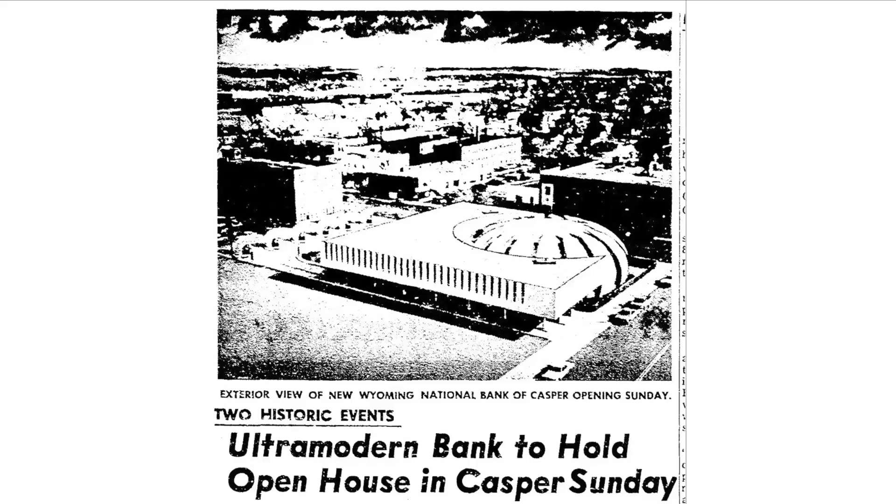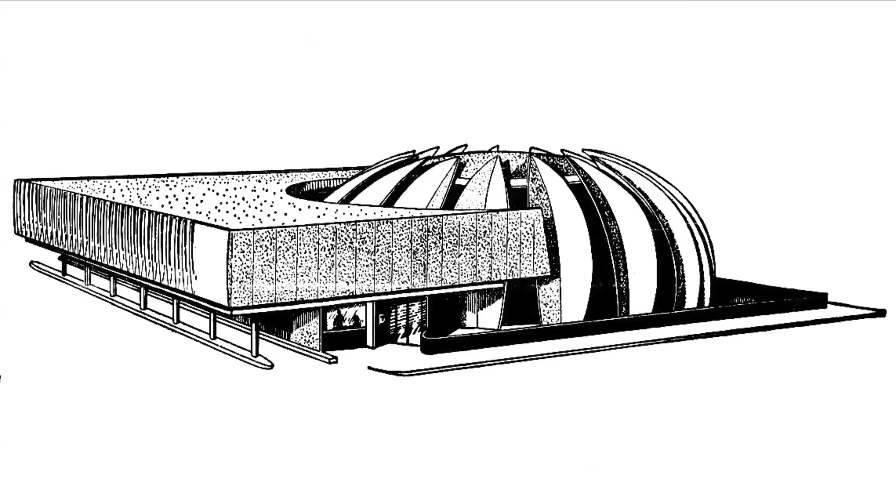And here's just a news piece about it, and a difficult to see photo of the exterior. I like the stippled drawing because it gives you a good idea of really what the building is about. People in Casper called this the orange peel, which I would agree with.

Here's an ad for Idealite concrete, a special lightweight concrete used on the building, and of course the company that makes it had to feature it in an advertisement. It says they utilize lightweight concrete in the large leaf-like blades that form the building's distinctive domed rotunda. The 20-ton blades were created as a work of sculpture and to furnish the required floor space. Each blade is part of the wall as well as the supporting column, making possible a circular room 86 feet in diameter, entirely free of interior supporting columns. Then blah, blah, blah - if you use us, hire us.

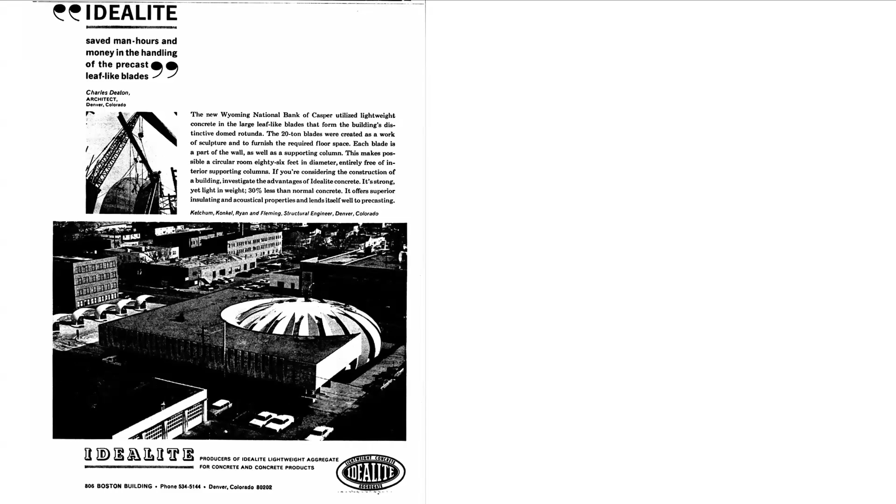And then, of course, there's Deaton's house. This was in 1966. I'm not going to go into great depth on his house because I'll let a friend from Historic Denver talk more about it.

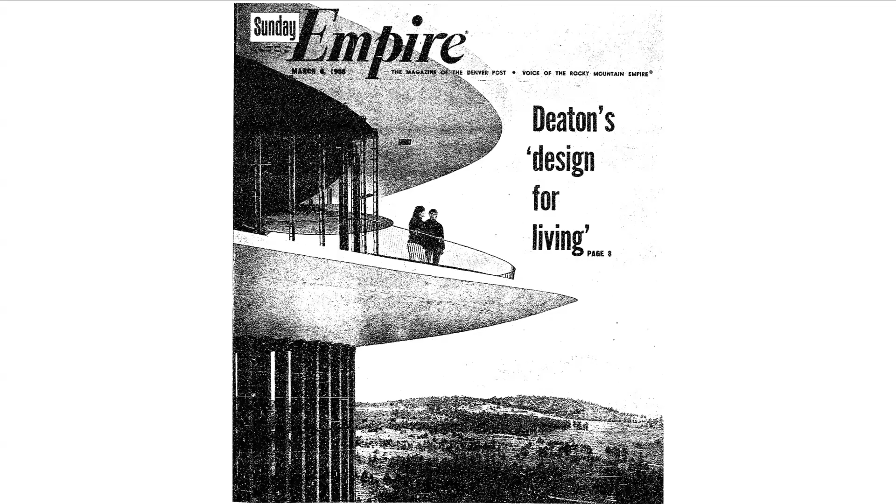Deaton was not working in the shadows doing amazing things - he was clearly a great promoter because all of his projects were very well covered in the news. Thank goodness, it makes it easy to get information about his works. This is the cover of Denver Post's Empire magazine, where his home landed on the cover in 1966 when it was quote unquote complete, although the house was never really complete in his lifetime. It had a huge, three 2-page spreads about it.

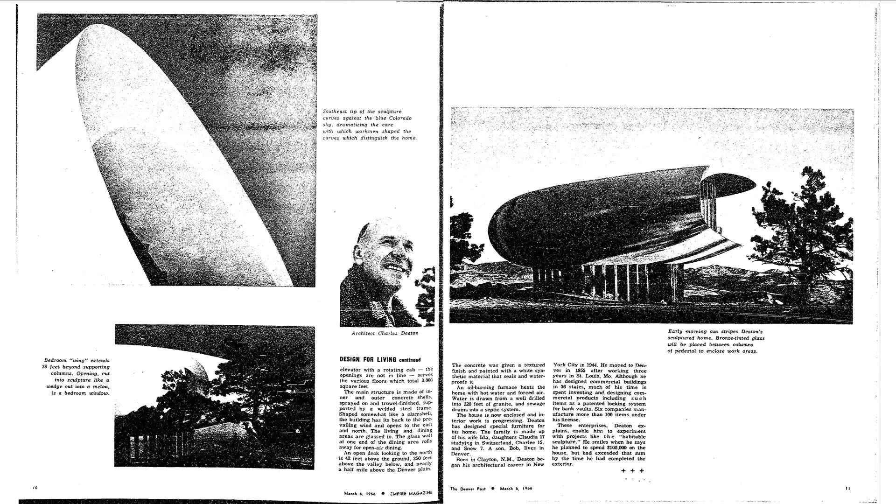So you might wonder, wow, this guy designs one bank and suddenly he's building this wonderful $100,000 house on the side of a mountain - where is he getting all of his money? Because it certainly wasn't from architecture. During his career, particularly working for the bank supply company, he was developing all sorts of inventions, constantly coming up with new ideas.

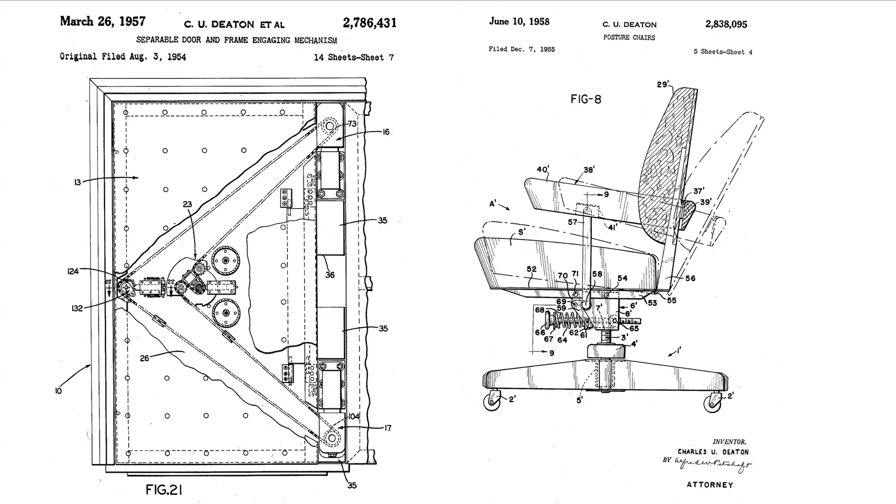He designed furniture, lighting systems, and all sorts of stuff for bank vaults. In fact, around the time his house was built, there were companies already selling over 100 products that he designed under license by him, and that was actually making him very wealthy. That, of course, allowed him to do what a lot of architects wish they could do - not have to worry about profit while designing, because he already had profit coming in other ways.

So here's a couple ads - on the left is a furniture system that he designed, and on the right is a lighting baffle that he designed.

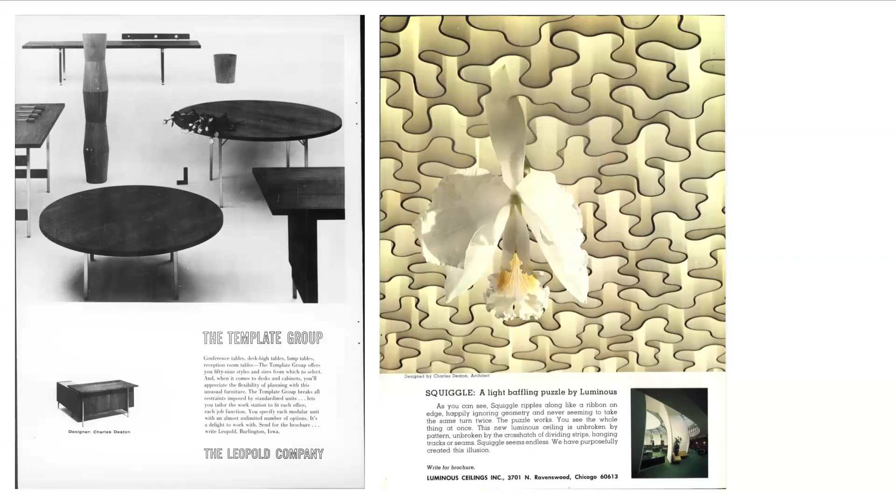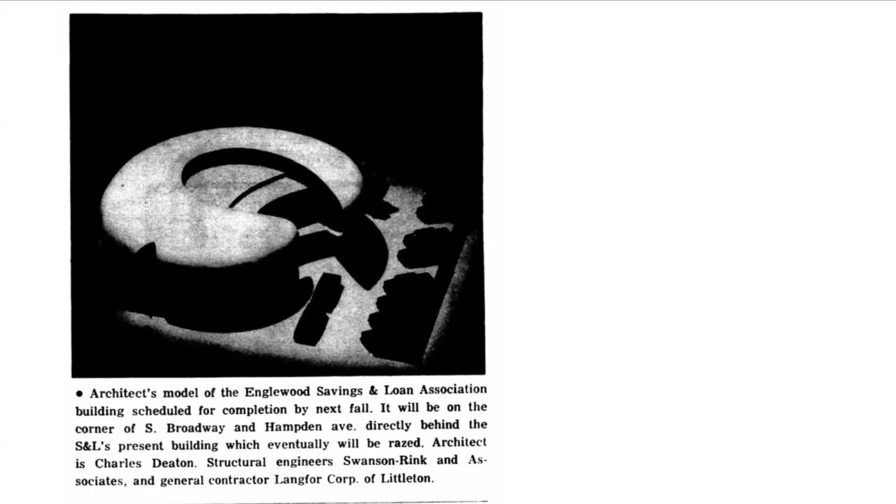This is a model. The model is an important part of his buildings. This was before all the magical technologies we have today, where things can be designed in 3D and spit out drawings. There was no practical way Deaton could create drawings for this building, so the contractor was asked to take the model, measure off of it, and basically replicate it in full size. This was the model the contractor would have used to build the building.

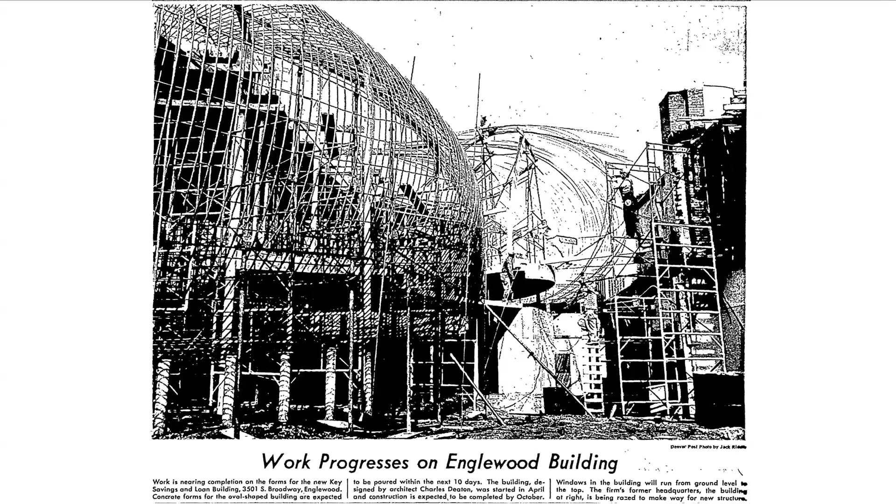There's another shot of the model. This is a difficult photograph to see, but it's the building under construction. Of course, inside all of that concrete is steel rebar, so the concrete sculpture you see today has a steel sculpture beneath it reinforcing the concrete. And of course, Idealite had to jump in with an ad of their own.

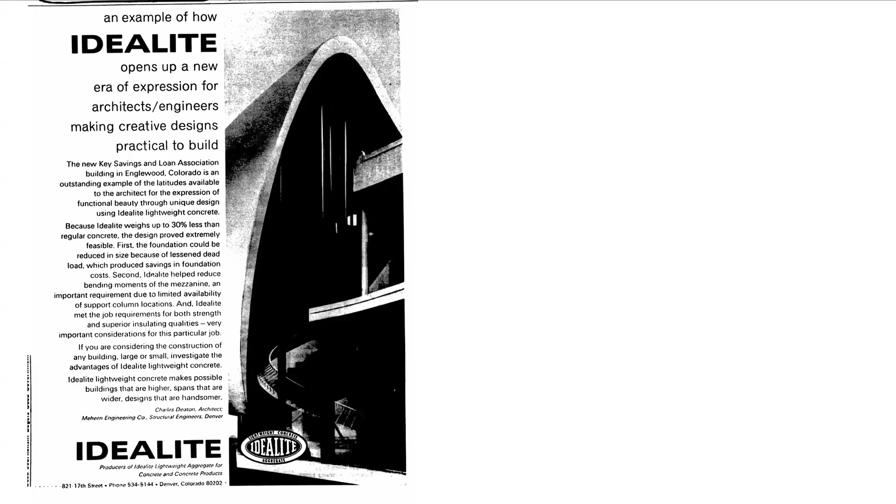The new Key Savings and Loan Association building in Englewood is an outstanding example of the latitudes available to the architect for the expression of functional beauty through unique design using Idealite lightweight concrete. Because Idealite weighs up to 30% less than regular concrete, the design proved extremely feasible. First, the foundation could be reduced in size because of a lessened dead load, producing savings in foundation costs, and Idealite helped reduce bending moments of the mezzanine, an important requirement due to limited availability of support column locations. Idealite also met the job requirements for both strength and superior insulating qualities, very important considerations for this particular job.

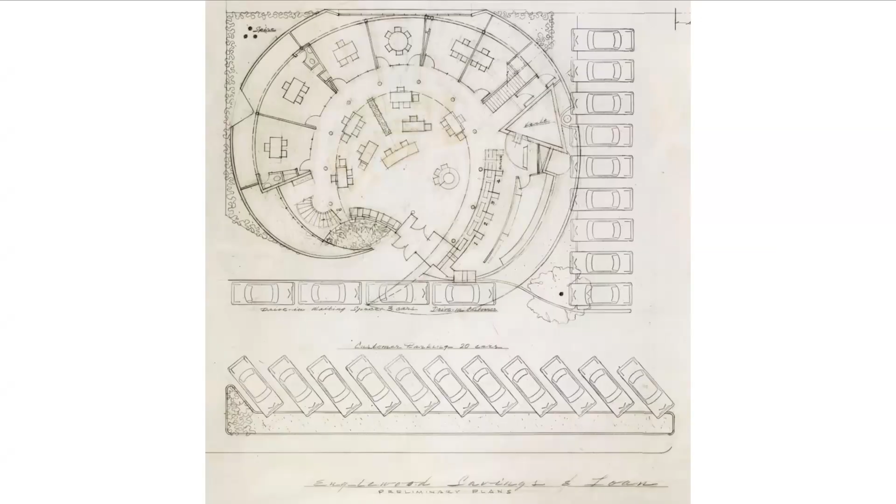This is one of his drawings for the building, one of the few drawings, because of course everything was coming off the model. But this is a wild building to photograph, because everywhere you turn is a new and interesting composition.

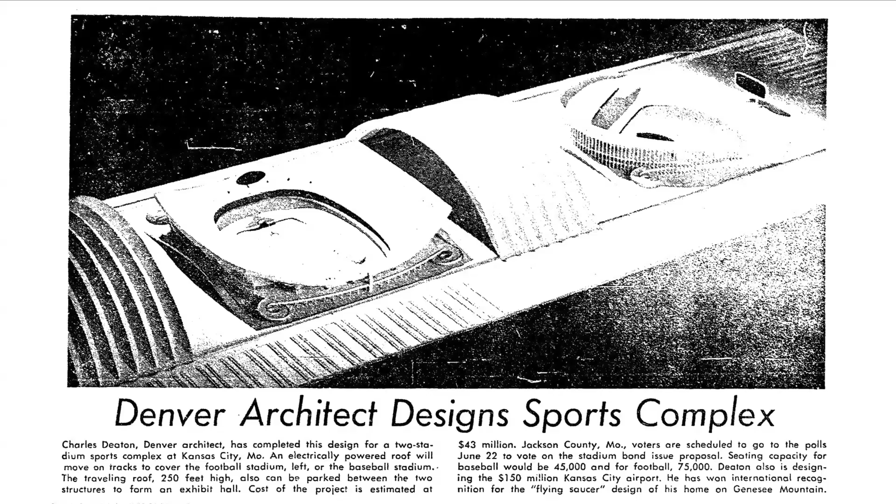So then there was another part of Deaton's career aside from him designing banks, and that was that he also designed a couple of well-known sports stadiums. If you're familiar with, I don't know if they've won anything big lately, the Kansas City Chiefs play at Arrowhead Stadium in Kansas City, and their stadium was designed by Charles Deaton.

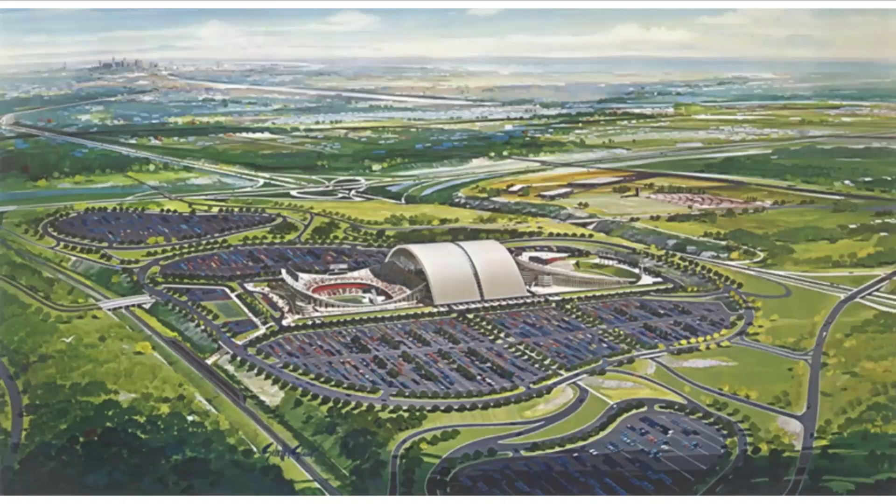It is actually a 2-stadium complex. The other stadium is the baseball stadium where the Kansas City Royals play, and he also designed that. The original concept for this complex, built in 1972, was to have a big moving roof that could be moved over one facility or the other.

Unfortunately, Deaton hired an architecture firm, a local firm, to help him. I don't know if I really want to remember their name, but I did write it down here somewhere: Kivett and Myers.

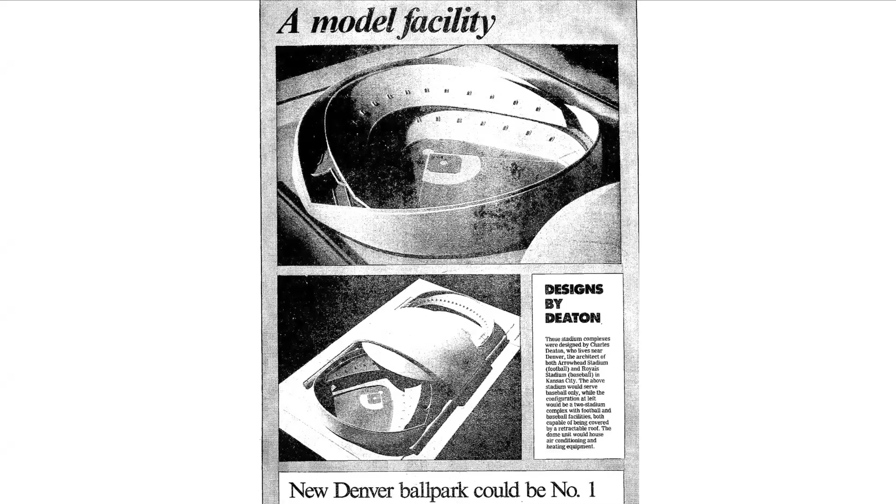All of this high-level overview of Deaton's career should show you that he really was a magical combination of his parents. He was both an artist and an engineer, and he was full of ideas through his entire life. It's kind of a shame that we didn't see more work out of him through his lifetime. I think he probably would have designed many more stadiums had his architects not stolen the credit from him. But I will be shouting from the rooftops as long as I can about him being the true innovator in stadium design. Unfortunately, the Chiefs and the Royals are talking about maybe leaving their facilities, but I think it's telling that they are still using them here 50 years later.

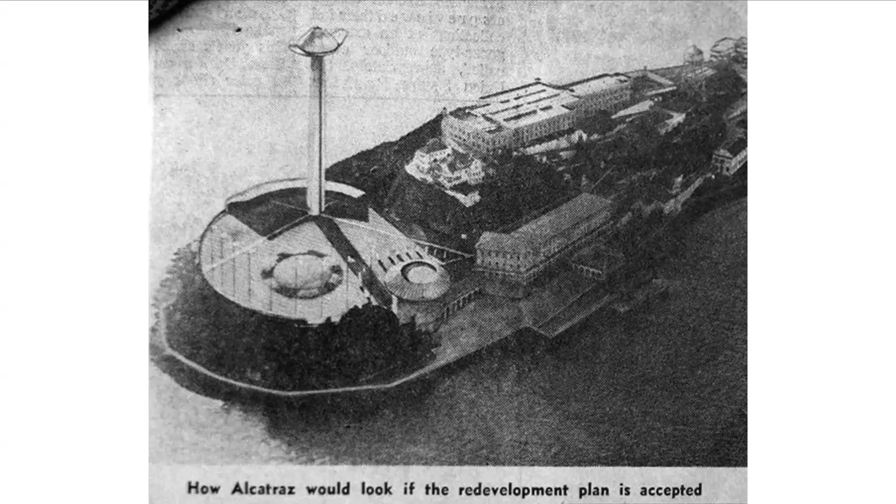I have a question. So to my knowledge, Arrowhead Stadium is famous, or maybe infamous, for being the loudest NFL stadium.

It does have that notoriety of being the loudest NFL stadium. So I'm wondering, since he was so kind of ignorant to the sport, was that an intentional or unintentional consequence? I'm guessing it was a happy accident, but I don't know the answer to that question.

Not in any way that it was satisfactory, in that by that point the damage had been done. All the other cities and sports owners that would have hired him ended up hiring the Kansas City firms that had originally worked for him, and not him, unfortunately. He did try bidding for other projects. He tried to offer the Cubs a new stadium design, which was probably never going to happen, and proposed other stadium designs around the country, but none of them were ever taken up, unfortunately. There are other stadium designs he did at a high-level concept for other cities, they just were never built.